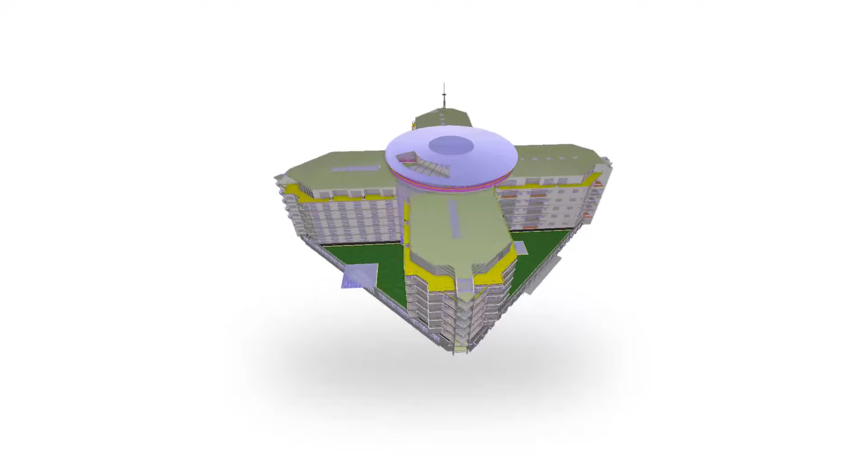Building Information Modeling, or BIM for short, is a wonderful tool to create great architecture. Unfortunately, many might believe that BIM is out of their reach. This is because adapting from 2D drafting to BIM might seem time-consuming and costly. Also, it seems that BIM means a whole new workflow and methods which you need to learn from scratch, and

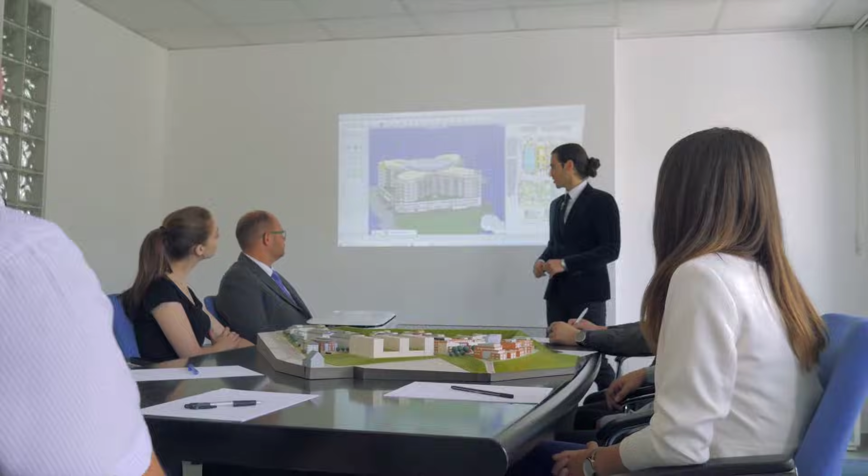the new requirements and legislations may seem too complicated to follow. Our mission behind ARCHLine is to open a gateway to BIM. ARCHLine makes the transition from 2D drafting to BIM step by step. It takes you from 2D to 3D modeling and introduces BIM parameters to your workflow. Sharing your projects with other professionals is effortless. The software makes sure that you can use your already existing CAD skills, files and projects to stay competitive.

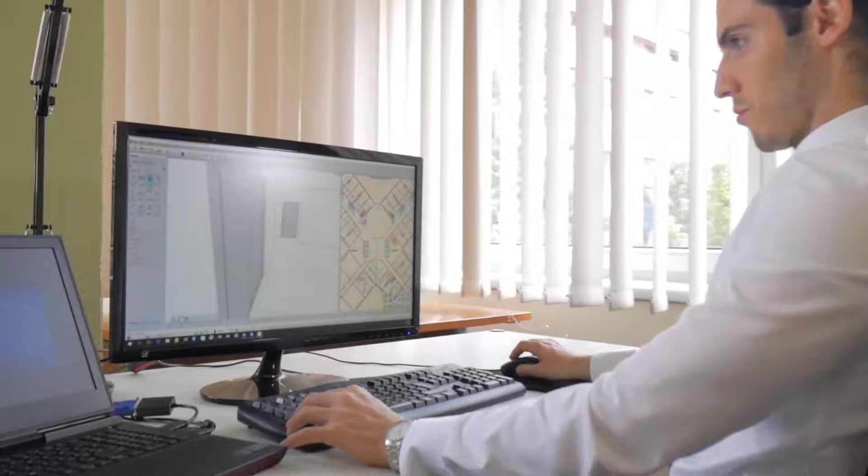The gate is now open for new challenges and previously unavailable projects. ARCHLine is an out-of-the-box IFC-certified BIM software. No extra plugins are needed to complete your project because your design will contain everything in a single file. You will work together with other parties of the building industry seamlessly. Avoid misunderstandings. Use real products. Collaborate better than before. BIM is quickly becoming the standard. Make sure you are there with ARCHLine.

Hello and welcome to the ARCHLine webinar, Designing a Building, a Fundamental Elementary Course. My name is Zoltán Tóth. Over here is our resident architect, Mr. Illés Pap. Hello there. This is the first part of our 5-part Gateway to BIM webinar series.

The main reason why we have this webinar series in the first place is because we understand that there's still a considerable fear from BIM when it comes to everyday projects and everyday architects and engineers. Now the thing is that the question is always the same when people ask us what the software does. They always want to know how certain very simple everyday tasks could be performed with the software. So instead of making this kind of static videos, we decided to make a webinar series where we take one

project, which is in this case a 2-story family dwelling, and we are going to track the whole workflow. Today we are just going to focus on how to create very simple shapes, architectural elements, and do some kind of basic documentation and visual design tasks. But in the long run, as the show is going to progress with the other installments, we are going to look at how to use external architectural data, geodetic surveys, for instance, how to work with IFC files. That's right, how to collaborate with other software platforms, how to get architectural data out of the system, some basic elements of visual design, and something more elaborate when it comes to rendering, and eventually we talk about the everyday benefits of using BIM for a project like this one, for instance.

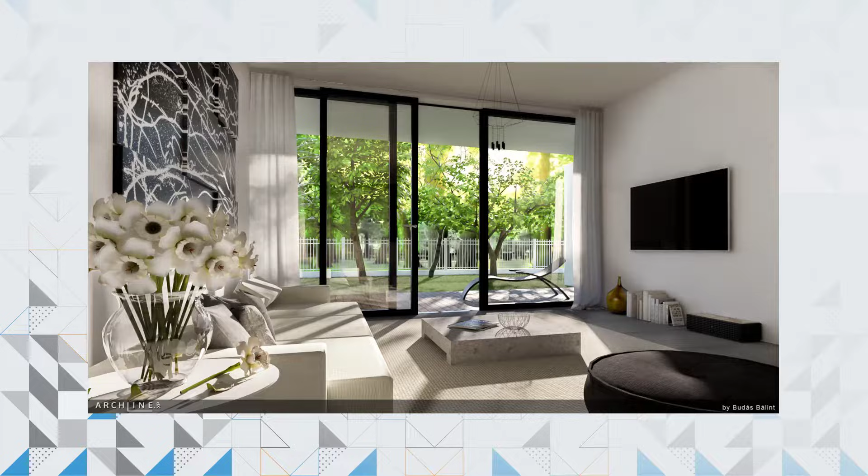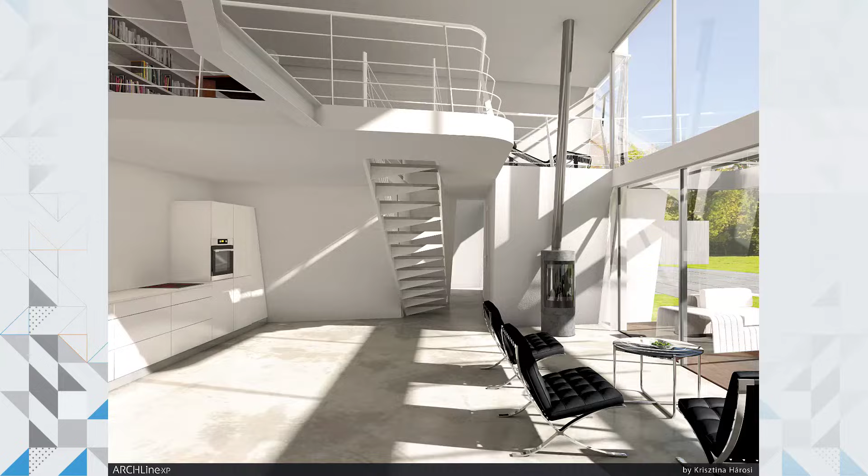Can you mention a few examples? For example, if you already have Artlantis, you can directly import your model to Artlantis. Cinema 4D is also supported. So if you already have something you used to use with a previous solution, you can export your model into that, and with a little bit of tuning, you will be able to process the ARCHLine.XP data.

And create amazing, stunning visuals even if you work with third-party solutions. So there are two ways you can get a glimpse at the final product: within our integrated render, or by pushing it into another software if you already have that. One thing we always find very important with ARCHLine is that we want to work together with other software products as opposed to doing everything in our own environment.

Yeah, so if you have other software, you'll see that when it comes to products such as AutoCAD or SketchUp, we try our best to integrate with them and work together with them.

So let's see what we have on our agenda right now. Let's first talk about how to create very simple drawings, how to put together an architectural model, and how you go about creating a building, based on what you have here in front of you. And I think we should also talk a little bit about the interface.

Oh, definitely, because I'm sure some of you watching our show might not be that familiar with the interface. Now, as we share the screen, you'll see the interface is quite similar to other similar solutions. We also have the ribbon bar at the top of the screen, the classic sidebars, the bottom bar, and the workspace.

In terms of these simple areas of the interface, we are pretty much similar to anyone else. So if you already know a solution, you'll have a little bit of an advantage, because you know where to look for the tools, where to find them. The reason we also have these is not just that we'd like to position ourselves as an easy-to-learn CAD software, which we really do believe we are.

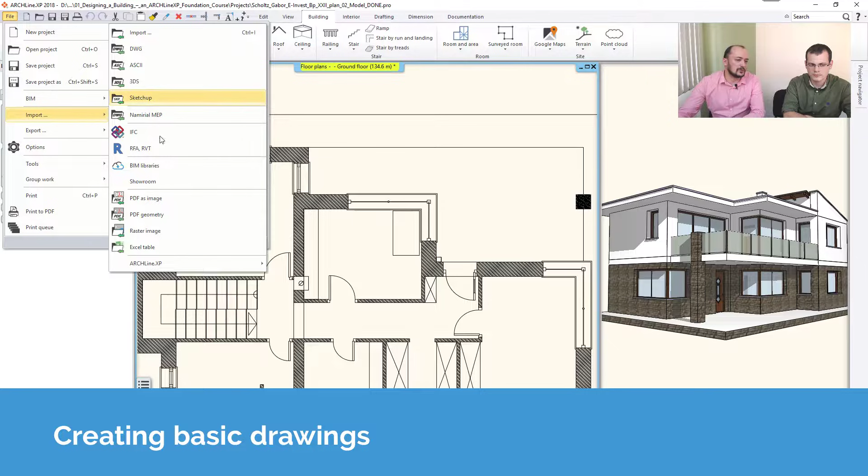If you'd like to start working with a drawing, you can either load a paper-based scan, for example. That's all found in the import tool - go to File, use import, and find the format your files are in. We will cover this, I believe, in the following section.

But if you have nothing, just a plain white paper, you will just start up ARCHLine. A dialog will come up similar to this, and you click here to open a new project, then fill up the basic BIM information about this building, like the location - you can determine where this building will be on Earth.

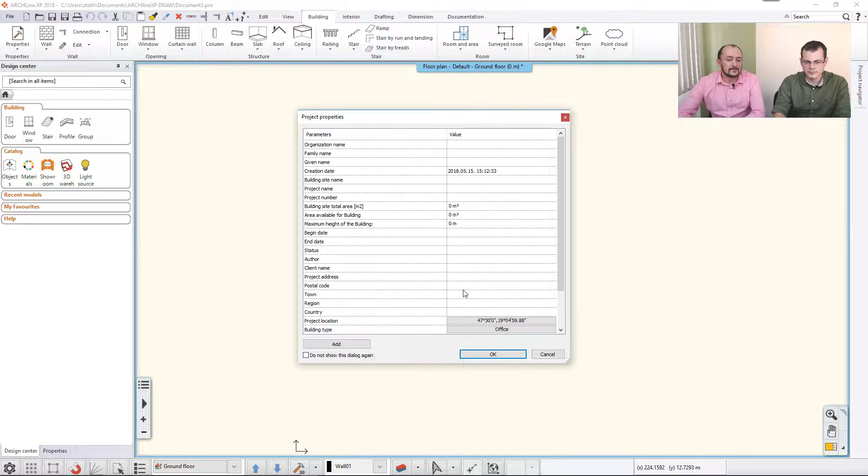You can set up the name, the designer's name, the project name, and all this information. Actually at the end, if you fill these up, you can reuse this data. You can semi-auto-fill the title box as well at the end. I will show you that in the documentation tutorial or workshop, which we will do in a later session. So now you can actually just skip it whenever you would like to set up this data. You will be able to find it in File, BIM, and Project Properties. That's the same place, and then you can start working. So either you fill it up or not, you can just start working with the tools.

Now, if you are about to draft a building, you will likely start with the walls, or sometimes you will start with drafting items like 2D. I don't know, you just would like to set up a grid or something like that. In that case, you will start with the drafting. But other than that, you will start with the wall tool.

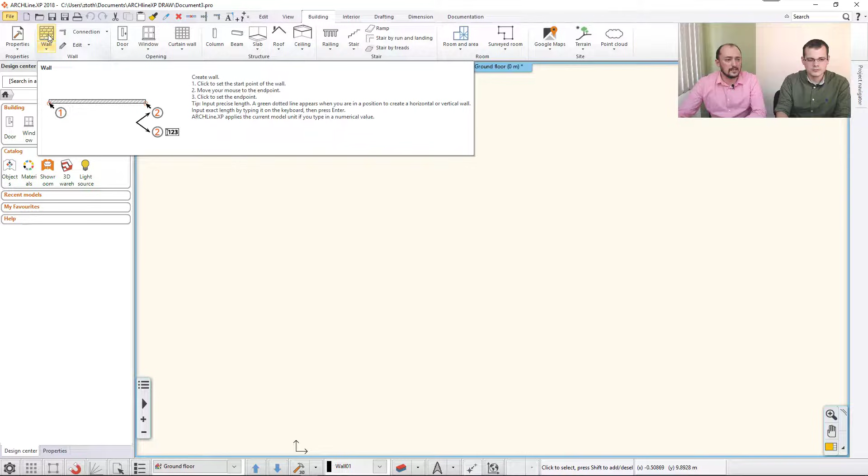Whenever you start with a tool, any of these, the software will use the current default settings. Now, if I start the wall tool, I can see that the current default setting is what we call the one-layered 38 wide wall. Now, we are working in meters, so that means this wall will be 0.38 meters, 38 centimeters wide. Its thickness is what you can see here as a number.

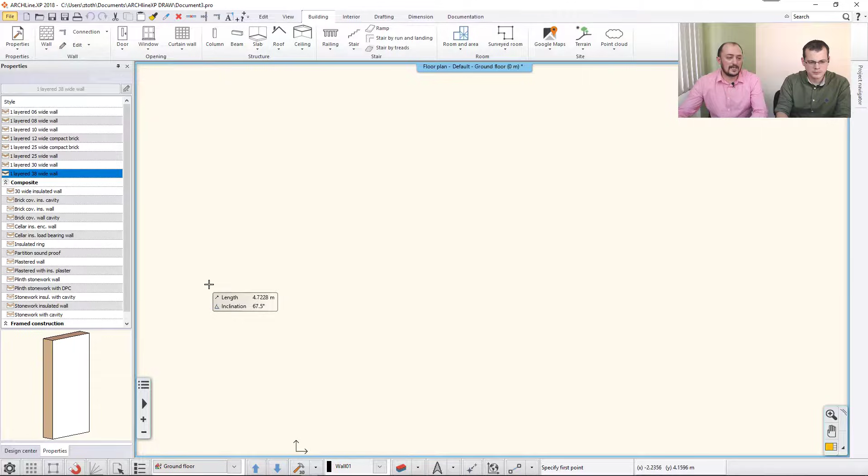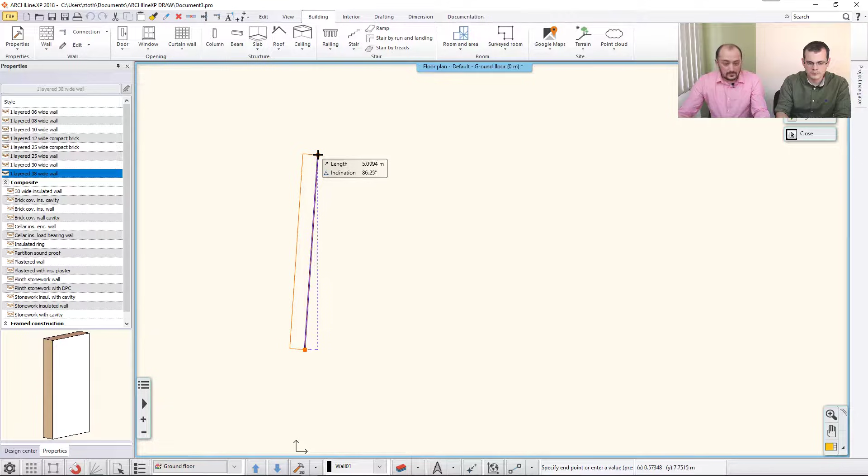And then when you would like to create something with that, you start the tool, select this, and click somewhere and move your mouse. And I'm not holding down the mouse wheel, I'm just moving the mouse. So you don't have to keep pushing and dragging the mouse cursor. You just release it and move your mouse somewhere, and then either you type the distance that you know, or you just click somewhere, and then you will have the 2D and the 3D wall automatically. So this is how you can create this here.

Also, if you would like to create something, just as I mentioned, I know that this wall will be to the right and it's about, I don't know, 1.5 meters, and I just start typing 1.5. It actually depends on how the program settings are, but by default it accepts the dot as well. So you just type the distance and then you just keep drawing the walls.

Whenever you would like to terminate a command, that now I'm about to do something else, so I would like to skip drawing walls, I just hit escape and then the software goes back to the default settings. Right click works as well sometimes. Yes, right click sometimes means enter. It depends on the command itself, but escape always means that you would like to escape that command and you don't want to do anything with that.

So this is how you can set up a simple layout of literally all sorts of drawings. But if I would like to sketch this drawing that I have here, I actually have a building drawing, a printed copy of a building that I would like to process, then I can do that as well. Or this could be something that I went on site and I would like to process the values that I measured at the survey. So either way, I can just start working with these.

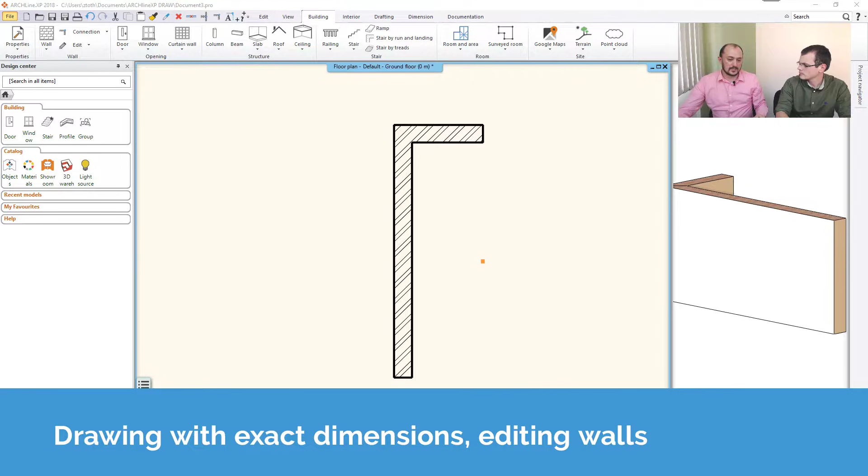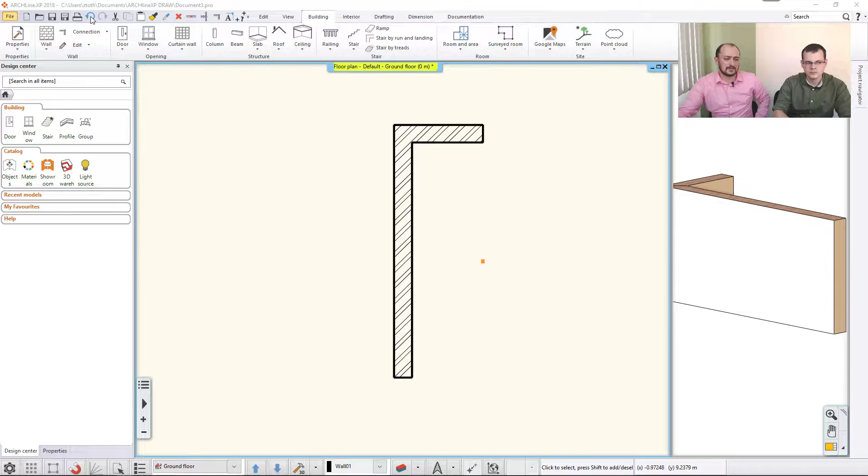Now, actually, to be able to remove these two walls, it was just an introductory sketch here. I can either undo these steps. Keep that in mind that undo is not infinite. Undo is only 32 steps, so don't rely on that too much. But at least 32 steps you can go back and you can just undo these two steps as well. But also, if you would like to, you can erase these. You can just select the walls and then you can erase these. Later we will talk about this selection a little bit more, so I just keep that for later.

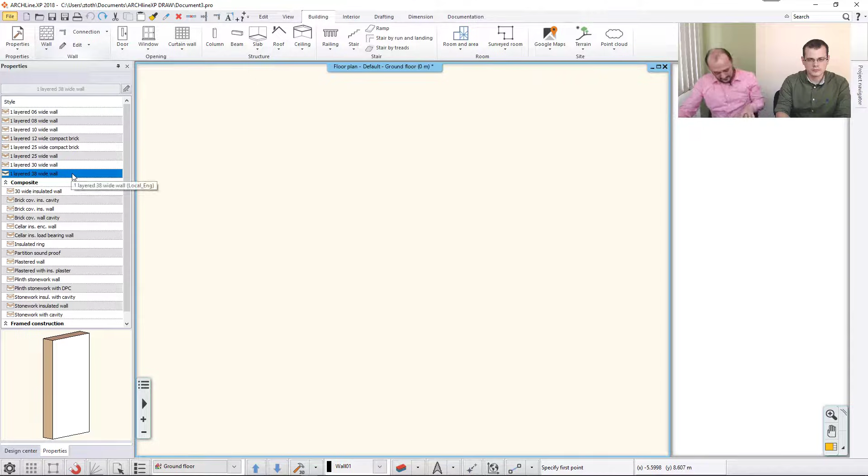And now I just undid these two walls and then I start working with the walls. So let's say I would like to draw a wall, and I know that its length was 11.9 meters. Now keep that in mind that what you draw, the wall itself is created by its blue line, that's the reference line. And now based on my drawing, I would like to actually draft the top line of this wall. So you want to have the line on the other side?

There are two ways to move it to the other side when you work with the wall tool. One way is that sub commands appear on the right hand side, so you can just click here and use the right side option. Or, other than that, you can actually use the F5 key.

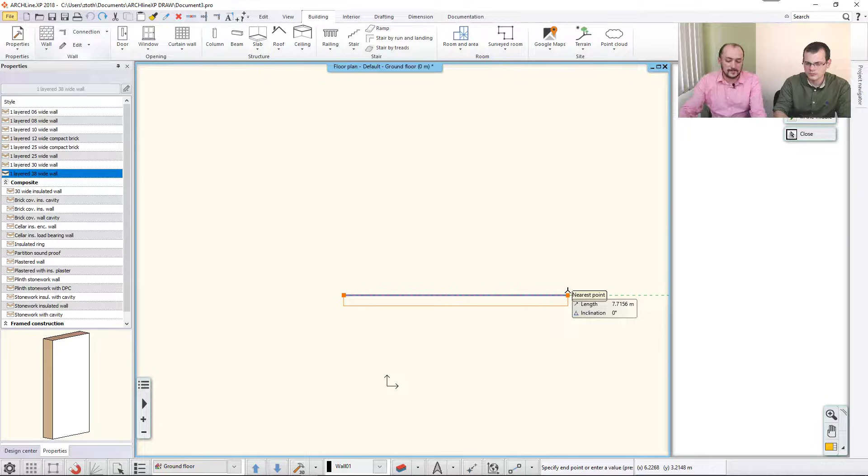F5 cycles through these reference lines, or in some cases reference points later. You just hit F5 and move your mouse and you're back to the initial status. Now I hit F5 again and hold my mouse, move a little bit - now I'm at the center. F5, move the mouse, now at the bottom. So this way you can cycle through.

This is very handy because you can do this all along. When you draw continuously, you can just cycle through this, because layouts are sometimes pretty complex, so it's necessary that you toggle between them pretty fast.

Yes, that's right. So let me just quickly sketch this, and I'll let you talk about other possibilities of how you can draft the layouts or actually drawings.

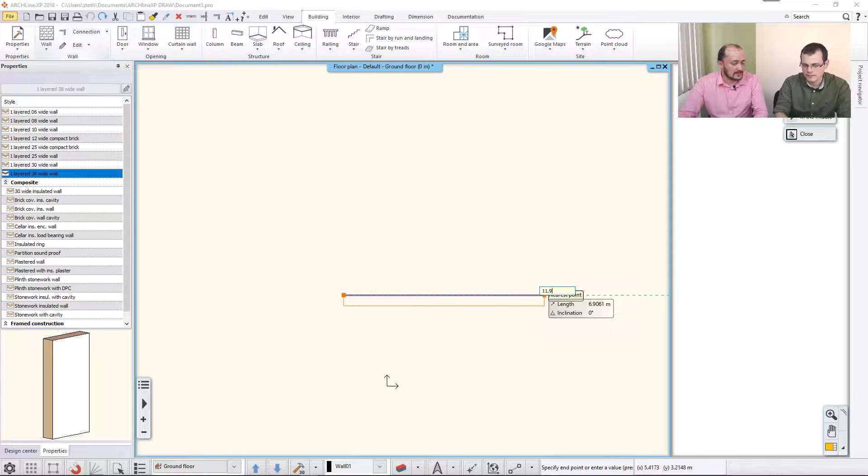One thing you skipped in the beginning, and we'll cover that later on - on the left hand side, you remember Elias mentioned that one. You can continue and I'll cover this. You can choose the wall type you want to work with. This is very important, that you can set up different styles.

We will talk about how that works, but the only thing you have to know at this point is that this is not an infinite list, of course. You can choose from the presets, but you can make your own as well.

This could be composite walls, different layers, structures, different height values. That all depends on what you actually want to work with. But these are the things that you can set up, and most importantly, you can carry this to another computer if you want to change your workstation.

The reason we stopped here is that there's a very important thing we have to illustrate, which is very familiar for CAD users. If you want to finish your drawing, you can obviously add the number if you know it, but if you don't, you can snap to nodes, what you see on the drawing.

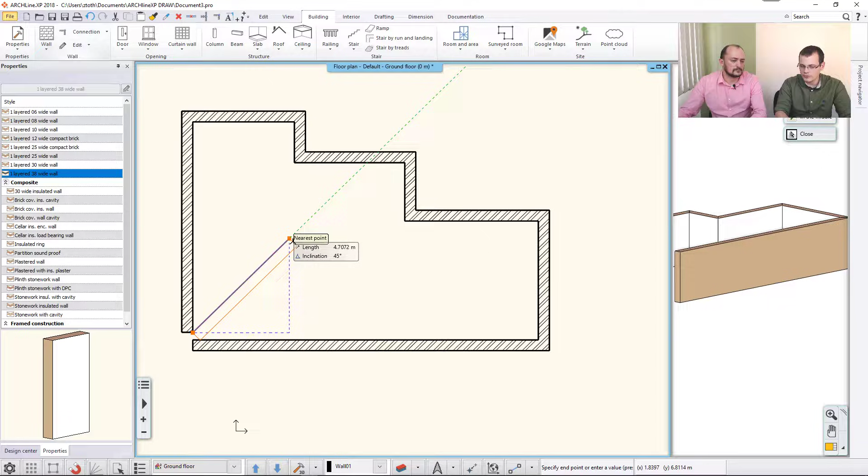So what happens now is that we are snapping to the wall just below this one, and we just click and we're done with that. We can finish the drawing like that, but we can also hit enter to close the polygon. Actually, if I just hit enter here, I wouldn't have this wall here.

The reason I did not connect these two is that sometimes you will create drawing parts that, either intentionally or unintentionally, are not connected. Whenever you'd like to click them and connect them later, you should just use these two commands - the L connection and the T connection. This works very well when you would like to connect these two items.

Now, talking about this layout - this is kind of a basic layout of ARCHLine, and I think it's very handy. You can work with this split screen view and see what happens on the 2D, and in parallel you can follow the changes in the 3D.

Also, if you'd like to swap the drawings in this split layout, you should use this tool here - this is the magnify window tool. If I click into the 3D, making it active, it's blue now, it's the active drawing, and I click here, then ARCHLine swaps the drawing. If I do it again, I click here and I swap the drawings. So this is how you swap the active drawings.

You can actually enlarge this whole drawing by clicking here and making it full screen, and then use it in full screen style, using only the project navigator to navigate through the contents. But at any time, if you'd like to go back to the split screen view, you should just use this, and then you are back to the default layout. The main reason you would use the 2D and 3D in parallel to each other is because most things you can do in either.

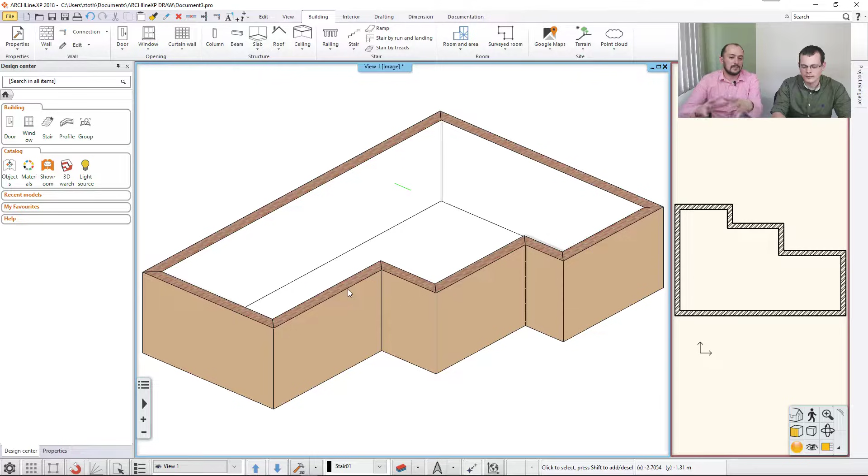So I just made a new layout, and now I will place a few other details like partition walls and so on. Just as you mentioned, we've worked with default styles, but you can create your own style. I will work with this 10 wide wall. I create this partition wall here, which is actually a load bearing wall. I create another wall, which is this one here.

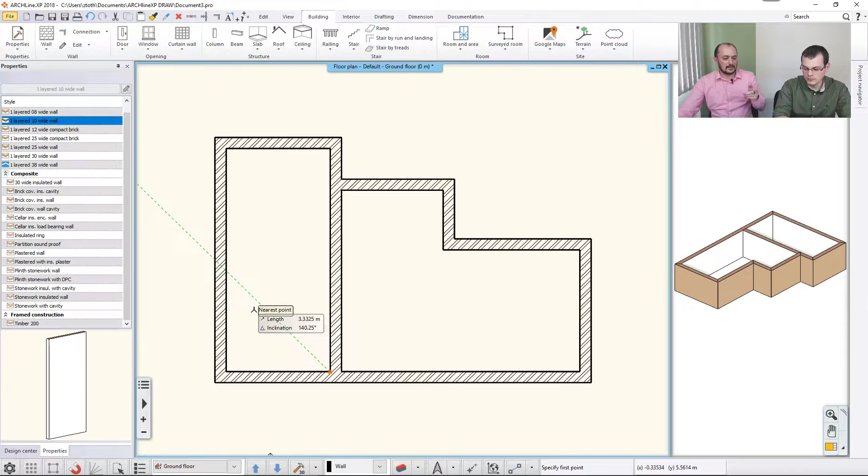Let's say I would like to create something that appears at a certain distance, but if I would like to extend this drawing, I actually forgot something. There is this tool which you can use to add inserts or add-ons to this layout. On my drawing there is a detail with a width of 1.8 and depth of 1 meter. I can change this, and when I say OK, I can place it over the wall.

Now it's important that when you hold your mouse at a point where it makes no sense to place this shape, because it's not in a wall, you will see this exclamation mark. Don't worry, that just means you cannot do that there. But if you move your mouse over the wall, then you can move it into place.

Again, here you can use the F5 key to cycle through the top point, the center point, and the bottom point, as you can see here. So now I know that this distance is 2.3. I type it, and now I have that. Now it's actually a great guideline.

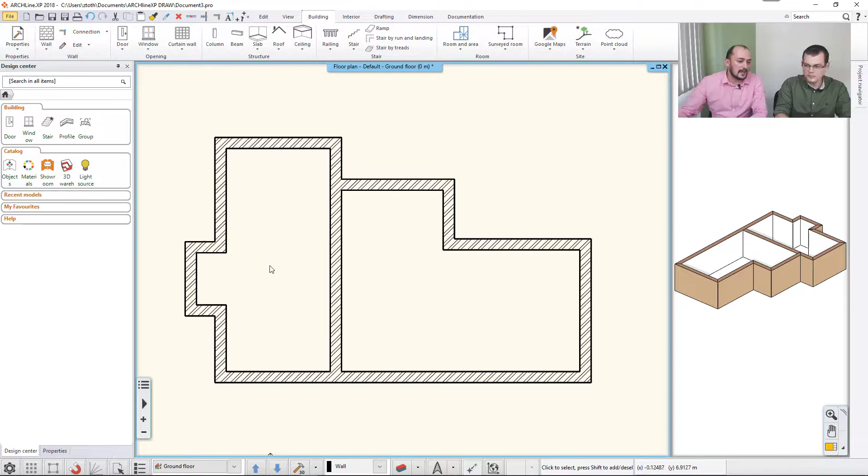I will have a staircase here, so now I can use this guideline to create a partition wall, and I create it here. I will also create a partition wall here. Now again, I need to cycle through these points, pushing it to the other side, not to the center in the middle, but to this one.

Again, I just keep my mouse here a little bit, then click here, move the mouse here, and either type the distance, or I just literally graphically draw the walls themselves. Now if I would like to create a few partition walls here, I can either do it like this, sketching the layout itself, or I can show you something else.

I forgot to mention that you can also lock the direction. So now I move my mouse to the right hand side, and if I hold the shift key and then move the mouse a little bit, the direction is locked. It's similar to what you mentioned at the beginning, but this way you don't have to move your mouse there first and then use it. You can simply hold this down and then refer to a point that exists somewhere else, horizontally and vertically as well.

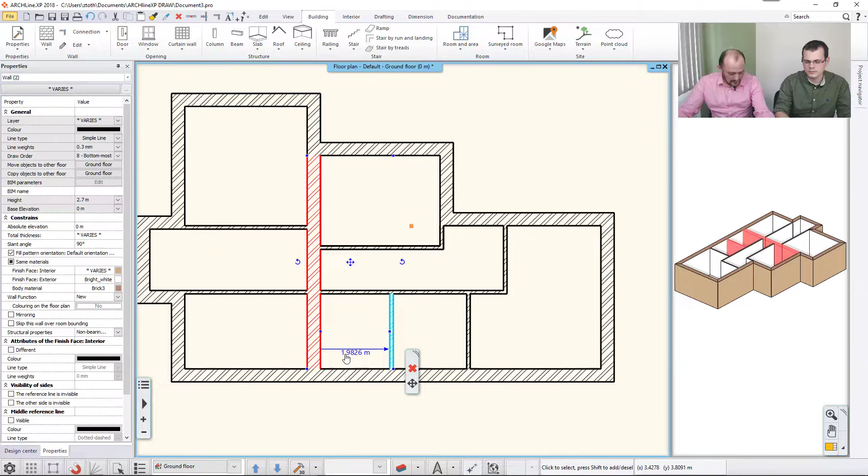Yes, that's right. So why I created this so quickly is that I know the distance between these two walls. There is a wall distance from here to here, which is 2.35 on my drawing. So I click here and type 2.35. What happens here is that you select one wall first, hit Shift and select the other wall, and then you are able to access this vector where you can add in the distance between the two.

Actually, we can also talk about the selection a little bit, how selection works, because now we have a few things to work with. So how do we manage them? Well, selection is pretty basic. You just literally click on the item and it gets selected. If you click on another item, that other item gets selected.

But if you would like to select two items, you can hold the Shift key and click on the second item to add it to the selection, and then all others will be added automatically. Now, it's important that if you select something first, it will be highlighted with a different color. That means that was the first selected item. Why is that important? Because based on that information, you can change the distance between the first item and the rest of the selection.

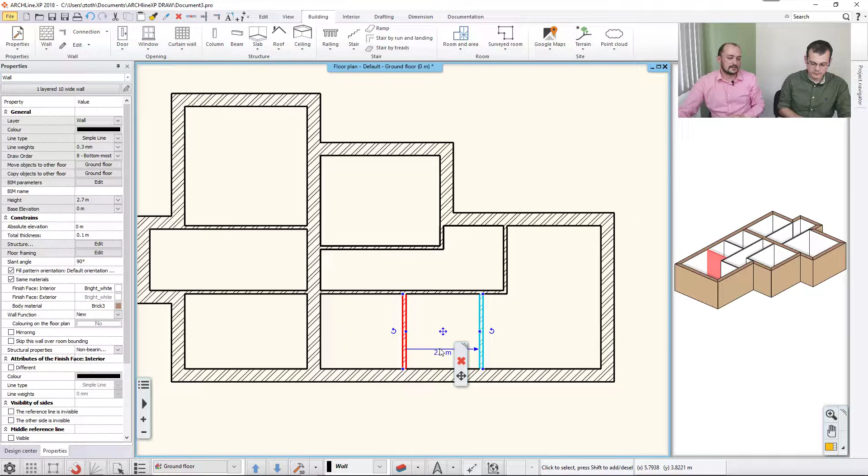So the first always stays where it is, right? Yes. Or you can just change the direction, so you can make the other one the first selected or highlighted one — you can do it the other way around. So if I would like to change this as well, it's 2.1. I just click first on this, Control click on the second one, and type 2.1 and enter, and that's it. Now, pretty much the same way, you can actually select partition walls and make them change for any sort of reason.

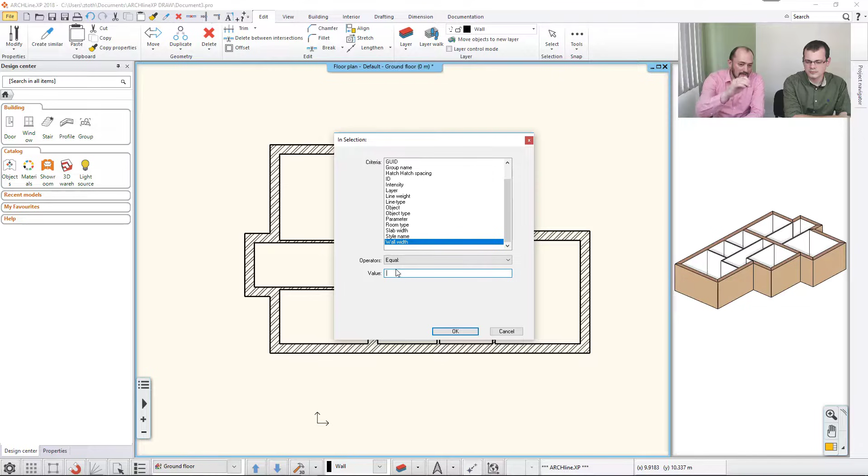Or if I would like to change the color or material of the exterior walls, I would like to use something like a stone pattern. I can click and Control click and keep adding these things, but actually there's a more sophisticated way if you know that all these items share a common property — their thickness, for instance. In that case, you can use the edit tool and this selection bar here with all sorts of selection items, including one called by properties. If you click there, you'll find a property which is the wall width, and then you can tell the software to please select everything that shares that wall width. It should be 0.38, and then everything is selected.

Supposedly we don't want to have this one in the middle selected, so how do we get rid of it? In that case, you can just use the knowledge you already have — how you added an item with Control. So if you hold Control and click on a selected item, it will get removed. So it's not selected now. Now only the exterior walls are selected.

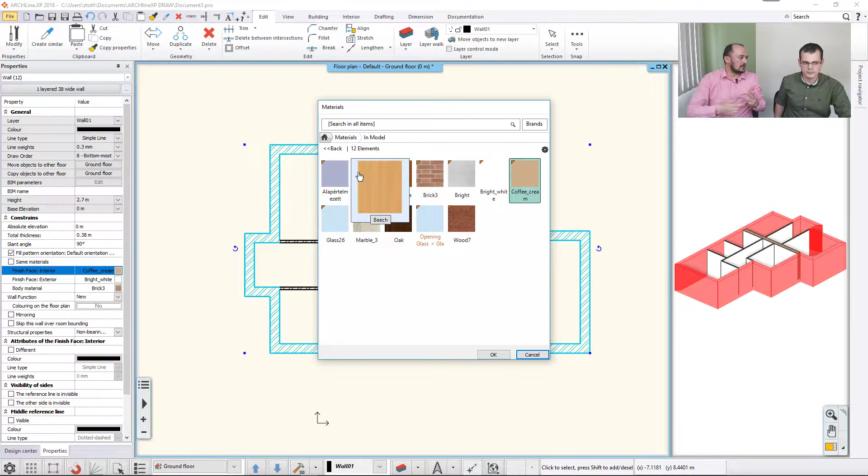So now I can go here and say that I would like to change this material to something else. This is the material library. I didn't mention it, but besides styles, ARCHLine comes with built-in material libraries, doors, and everything else. Now I'm working with the materials. I go back to the libraries, and you can see there are several sub-libraries where you can find these items. I know there's a stone somewhere, but I don't know where, so I just use the search field and hit enter, and it finds everything with the name stone. I'll just use this one, for example — stone decoration should be good.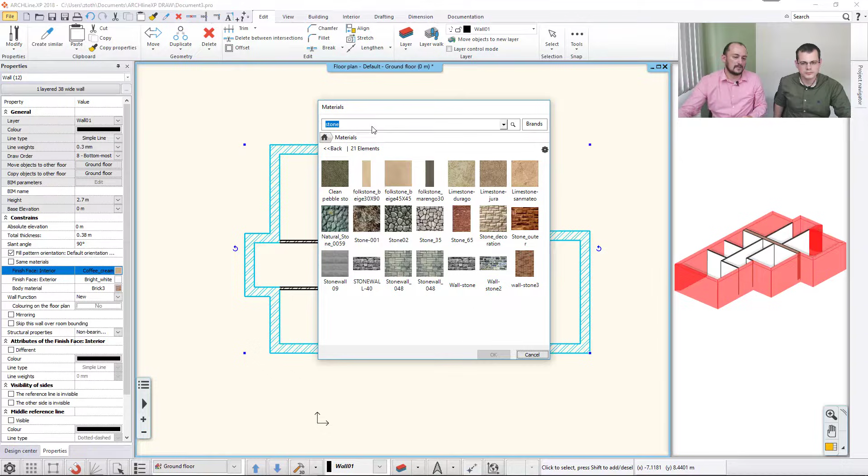Yeah, so that's it over there, and now I will just quickly create a slab under this whole building, using the slab tool. Now I can either manually click point by point, or I can use slab by walls and click here, covering the whole building, and hit enter to quickly place a slab under the whole building.

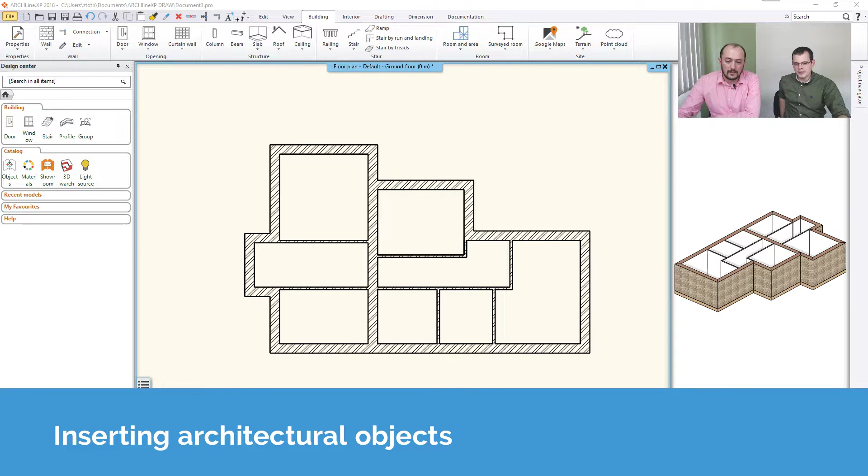And now we can actually talk about the architectural items. Yes, let's stay at this slab for a moment. So it was created with one click, recognizing all the wall shapes, and it copied the shape of the rooms from the load-bearing walls. But how do you define the outer shape? Let's say we want to have a balcony over there, or like a terrace.

Yeah, well, actually, you can. I could have already created it by just clicking on the points. But since I already have this, I can select it and see this outline appears with corner points and sides or edges. If I click on the edge, it comes with this list of options. So I just use offset, and snap it to this corner point, and now I already have a small terrace.

Or if I would like to do this in 2D, I go back to the 2D, enlarge the 2D, and I click here, offset, and move it here. So this way you can change the shape of an existing slab, wall, or nearly most of the things that you create.

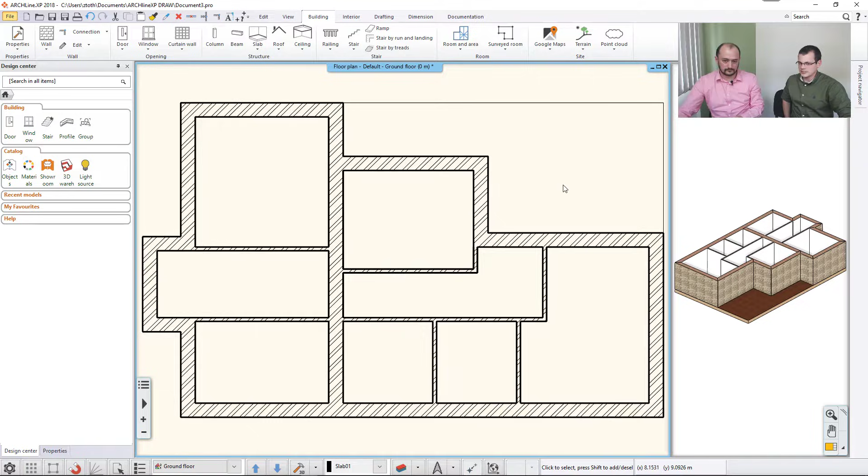What about ceilings? What about these kind of elements? Well, ceiling is actually, there are two ways. There is a tool called ceiling. If I would have only one floor, I wouldn't create another floor, I just would create a ceiling and then I'm fine.

But if it's a multi-story building, usually, and if it's not having like a suspended ceiling like this, then I just use the slab tool to create the following floor, and so on. And then actually I will copy this building part, make another floor.

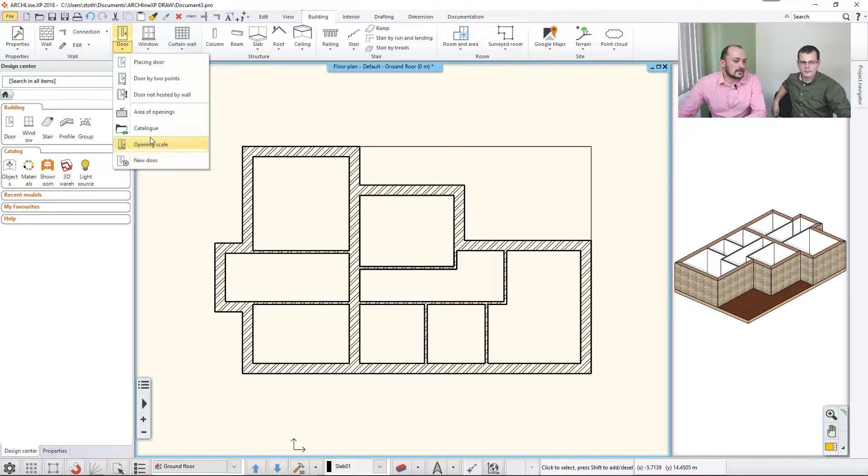But before I do that, let me just quickly place a few doors and windows on this layout. Well, the doors are here, and again, it comes with a list of options, but usually we use the placing door option, which is very simple. You just select the door type, click on the wall, and move your mouse around and find the best opening direction, and if it fits, then you just click again, and then it's there.

Now keep in mind that there are several different styles for doors in partition wall and doors in load-bearing wall. What's the difference between them? Let's see, there is this door in a load-bearing wall. If I move it here, see it's coming out of the wall - see that orange shape? It's not inside the wall. Yes, and the reason is that it fits best in the load-bearing wall because it has an offset, like around 10 centimeters.

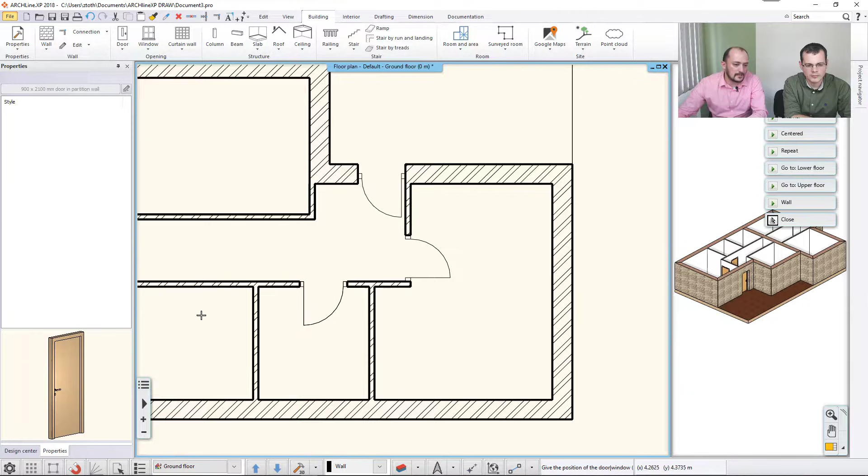So if I don't want to have that offset, I use it with a partition wall setting, and then it snaps to the side of the wall automatically. So I just do that, I click here, again, click here, click here, click here. So I just literally quickly set up a few doors. Naturally, you could position them by measurements - as you can see the blue nodes appearing, you can position them any way you want.

And also if you did not do that, but you would like to change that later, you can just simply select them and type the distance, and it will change the distance. Or the same way, you can change the size of the doors as well. So now we have these doors.

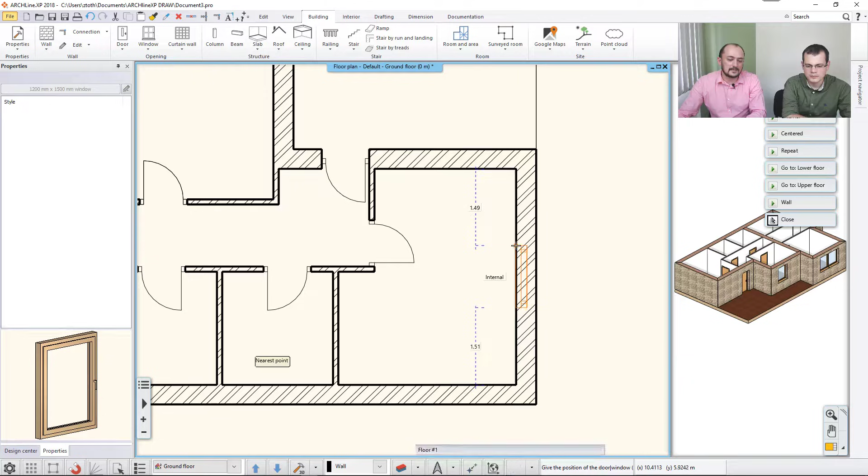Let's just create a few windows, and there I will also create an opening. Let's say there is a window here. And again, here you can use the F5 key, F5 center, F5 right hand side, and others, and so on. Yeah, so I just quickly add these, and I keep in mind that if I would like to change the size of them later, then I can do that, of course.

You mentioned an opening, so that means there are not going to be any door leaves. So how do you do that? Actually there are several ways, but the simplest way is that you just simply use a door - let's make a door appear here, and actually the normal opening is the easiest way. You just click here, set it up, and then it's over there. You can then click on the side, and click on the node, and you can change the size, snap it to the other point, and so on. So this is how you do it.

Now actually we have space for a staircase, so I will create a staircase. The staircase tool comes with predefined shapes. You can actually design your own stair shape as well, but mostly we work with these predefined shapes because that's the easiest way to create a staircase like that.

So I know I would like to create a U-form staircase, so I just click here, here, here, and snap it here. And see, now it's wider than the available space, but that's because the basic settings will automatically create a staircase with the width of 1 meter. So if I just select it and go to the details, I can see these parameters revealed. If I would like to change the width of this staircase, I just type 0.9, and this is the proper width.

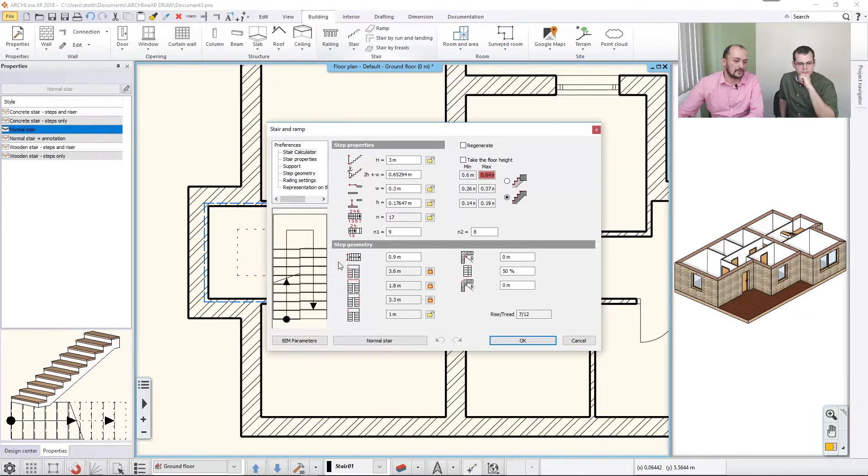And another thing, this staircase needs a railing. If you'd like to add it, there are again several ways. There's the railing tool, but you can also go to the settings of the staircase itself, and you can find these railing settings here, and then just turn on an existing style.

Now, you can build up your own railing styles too, but we do not cover that now. I just use a predefined stair railing, using this steel profile, and I hit OK, and the software automatically generates it.

But if you would like to, you have all the freedom to generate and create all sorts of staircase and railing styles using the railing tool. I will use this a little bit later.

So now I have this here. Let me just open up and see what we have. It's nice, we already have this first floor, it's coming together pretty nicely. But let's put another story on it, because this is actually a 2-story family house.

So how do we go about placing another story? Do we need to copy the wall layout, or how does that work? Well, actually, I could draw the following floor, but as you mentioned, the simplest way is if I have something that repeats itself, at least partially.

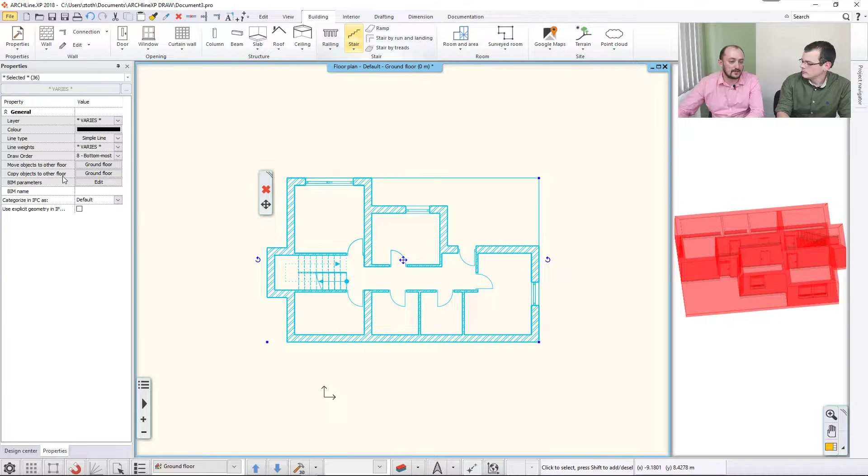Then it's easier to simply select it, and on the left hand side you can see an option to copy objects to other floor. Now these are not necessarily only objects like stairs and chairs, but you can copy everything that is selected. You click here and then you select the first floor.

The software comes with a predefined setting of 4 floors: basement, ground floor, first floor, and second floor. You can name them however you want, but this is the basic setting. And actually the floor management, or the story management, is here.

This is the status bar that I mentioned at the beginning. If you click here on this button, you can see the ground floor, the first floor, and so on. There are constraints as well that you can change, and the software can react to these changes.

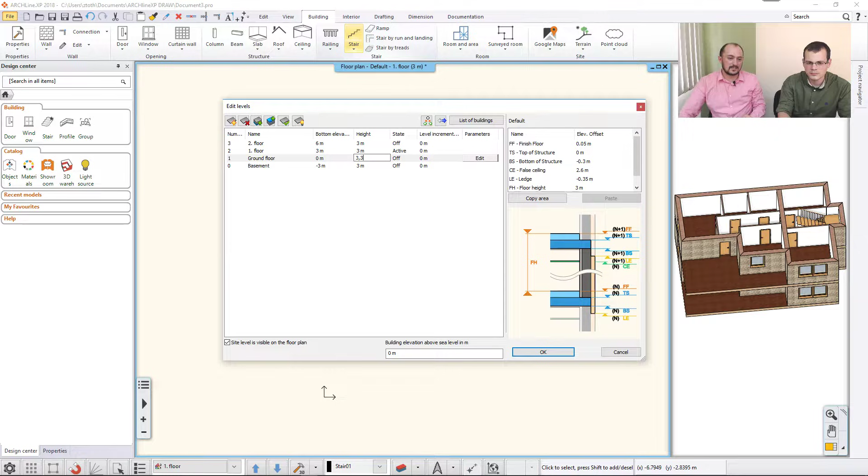Not to mention more sophisticated things, but if, for example, we had this coordination meeting and figured out that the height of this floor should change to something else, like 3.3, then I just type this distance here, make changes, and hit OK, and the software will adjust the walls automatically, because they are automatically constrained at the bottom and the top. You can work in another fashion, but this makes it simplest to generate this content.

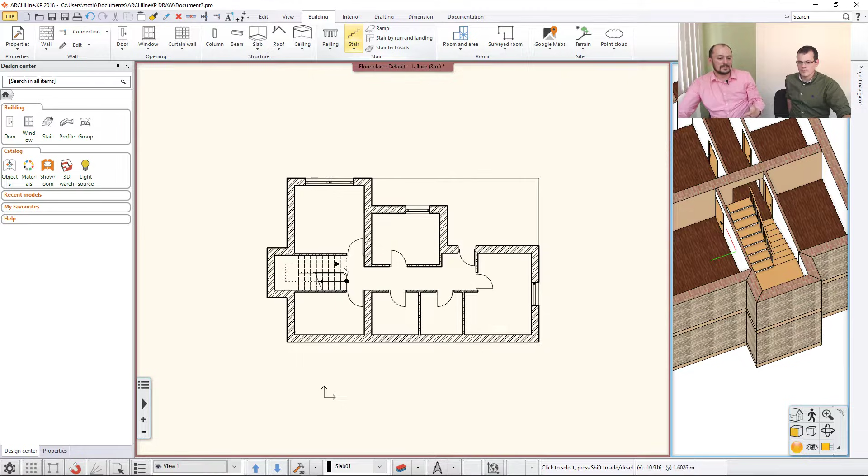And now that we have this extra level, we can customize it. There's one thing I need to change here quickly, and that's the staircase. I don't want to have an additional staircase. So first things first, I go to the settings of this first floor stair symbol, go to the support page, and disable the 3D creation.

I don't want to see the 3D body, I just would like to see the shape of it. Why don't you just delete the whole thing?

If I would delete it, then the 2D symbol would also disappear, and I would like to see that 2D symbol. So I just disable the 3D option, and then I go to this first page, the second page, and there is this 2D representation, which I changed to no section line. It's just one staircase as it is.

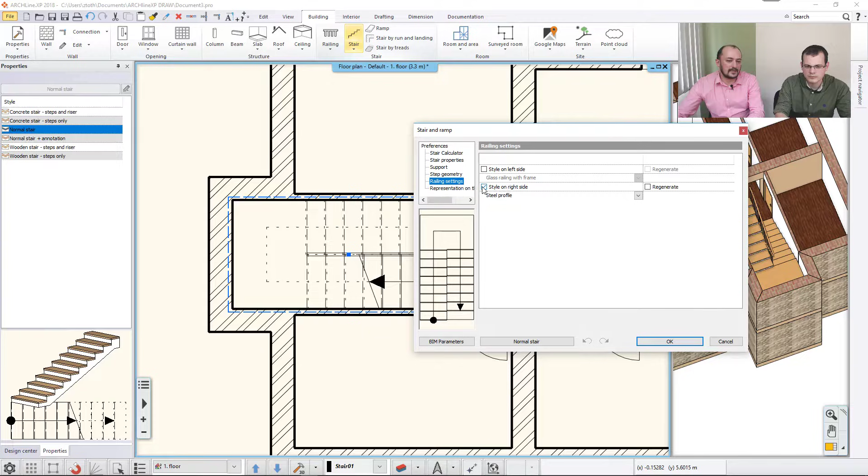And then I go to the railing settings, and I don't want to see the railing itself floating in the air, so I just hit OK, and there is only one staircase with one railing, and there is the second symbol here. And if I swap between the floors, like here, this is the ground floor and this is the first floor, 2D is correct, 3D is correct.

Now in the 3D there is only one problem, that we cannot use this there because there's no hole in the slab. There's no hole.

Yeah, you can actually, you have several ways to solve this. One solution is that if you click on this side of this wall, using this quick selection menu, you can swap to the slab, and you can find in the slab local menu, this is the context menu that you can find here, you can find these tools, and this allows you to literally draw a hole somewhere.

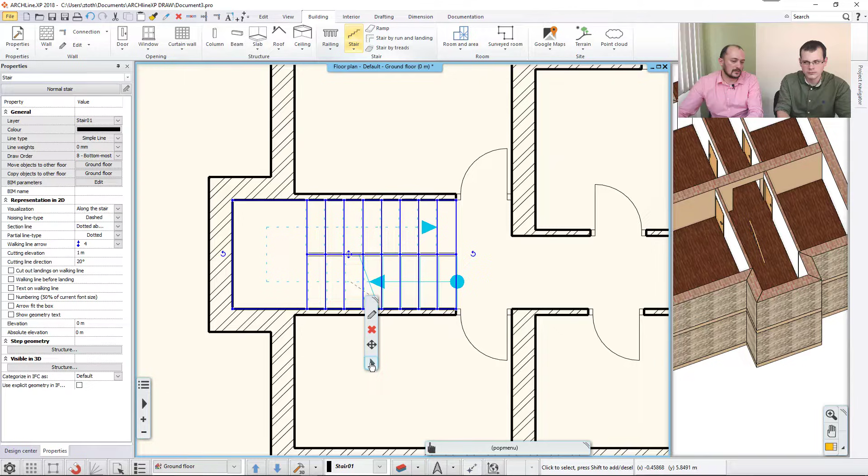But there is an even easier way to do that. If you click on this staircase and you use its own local menu, in its own context menu, then you can use this, cut slabs above the stair. If you do that, the software will auto-solve this. I assume you can fine tune if you want. Yes, but this is the minimal cut that it's necessary to be able to use this stair.

But if you would like to have a larger opening, you can just go above, find this slab here. I click here, and I cycle to the slab, and I can see the slab contour, even the hole contour, and then I can click here, offset, move it to someplace else, like with the slab itself when we created the terrace, and hit enter. Yes, and now I have this here.

So one another thing here, let me just add a pole, you know, like a column. And that's again with the column tool. The column again comes with several predefined styles that you can also build up on your own. And then you can just use the F5 to cycle through these points, as you can see.

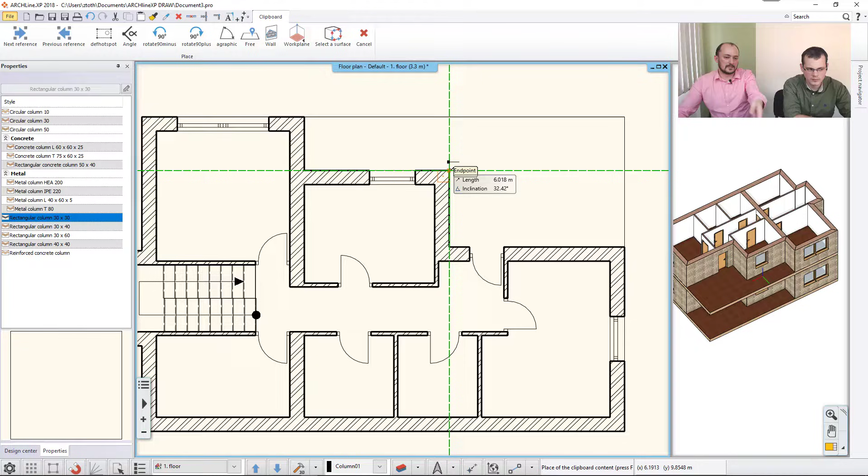And I would like to place this with its right top corner, referring to this point. I just keep my mouse here a little bit until these green lines appear, and then I can just place it here, and then I have the column, and I can repeat the same thing at the bottom floor.

Or now I can actually just click here and copy this content to the ground floor as well. Yes, you can copy. Yeah, that's right. Or you can just have it on one floor and have it extended above. But that's another setting. Yeah.

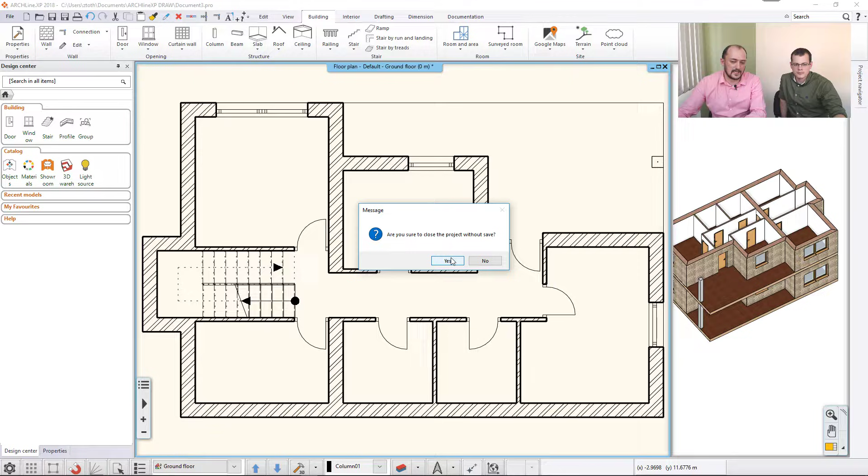Okay, what happens with roofs? Yeah, let me open the following project, which actually has the same exact project, little changes around materials and a little bit of extension. Using the same tools, we just created this following layout, changing a little bit of the settings of the walls and changing the layout itself. So now we can talk about the roofs.

If you would like to create a roof, you will have at least two options to create a roof, the flat roof or the regular roof. Now if you would like to create a flat roof, we actually have a roof floor for that. And then here I can create the flat roof. This is this part appearing here at the top. This will have a regular roof, but this here should be covered with a flat roof.

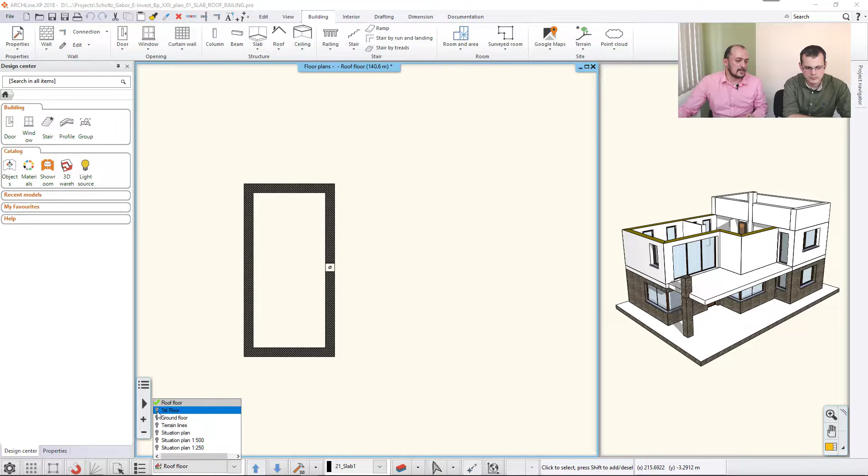If I would like to see the floor below this one, to be able to refer to existing points of the drawing, then I can just go here, open up this quick menu, the jump menu, and then I can just click on this icon to turn on the visibility of this floor and click here, and then I can see this contour.

So now if I use the slab tool in sketch mode, I can just click on the corners of this drawing. If I make a mistake here, I can just undo that. And I click here, and then if I hit enter, the software closes the loop, and I have this here. I can select it and make an offset to all of the edges to make something like this. Then I can click here, offset this until this point, offset this until this other wall here, and so on. So I can just customize it.

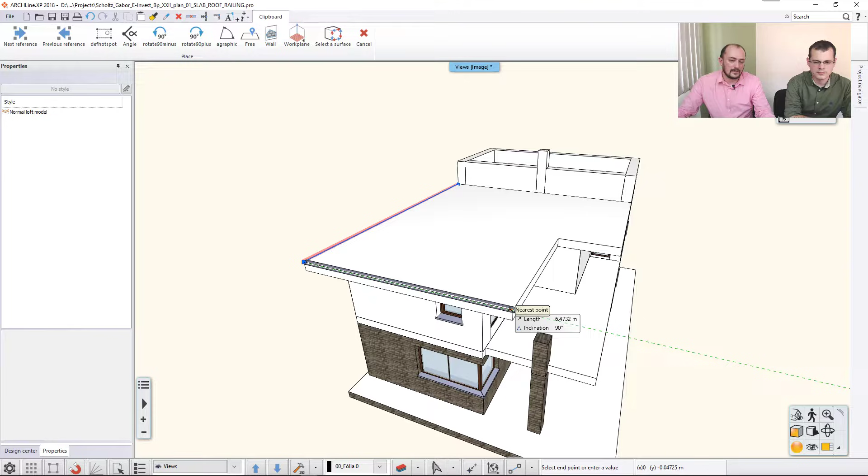And then if I would like to, I can also add some decoration profile all around using the interior sweep, and there's the sweep tool. With this one, I can select the surface, and click on the edges of this surface to design something like this - a decoration profile following the contour of this slab. This is actually a very useful tool for other purposes as well. Basically you define a path through which a profile would be dragged. If you have used SketchUp before, this is similar to what the Follow Me tool is doing there. So you have to define one profile.

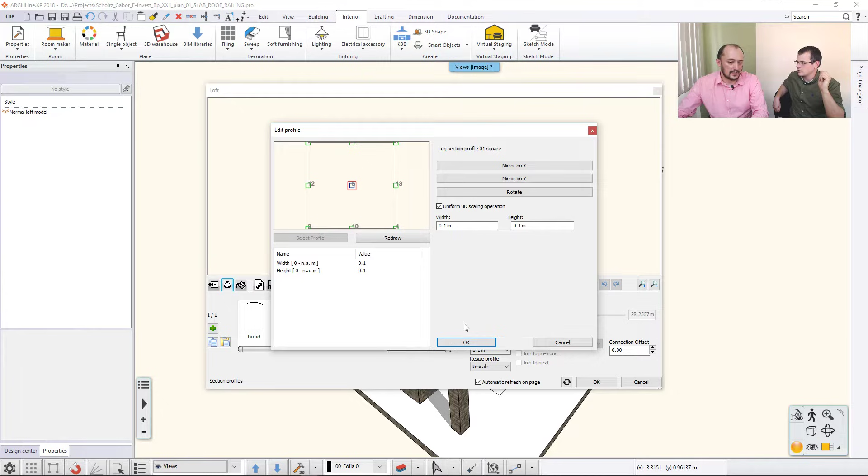What we are going to do now is make it a decoration profile. You set up the main dimensions, width and height. This is not going to change the path itself, so the path is definite, and then you just add another profile to it. I can also change the material, for example, to fit this decoration, to have something like a rusty gray. So I just keep going and make changes.

Now I mentioned that I would like to show you something before I go to the following - I think that would have been the flat roof. The roof itself on the other side of that. But before I do that, let me just finish this part here as we work on this area.

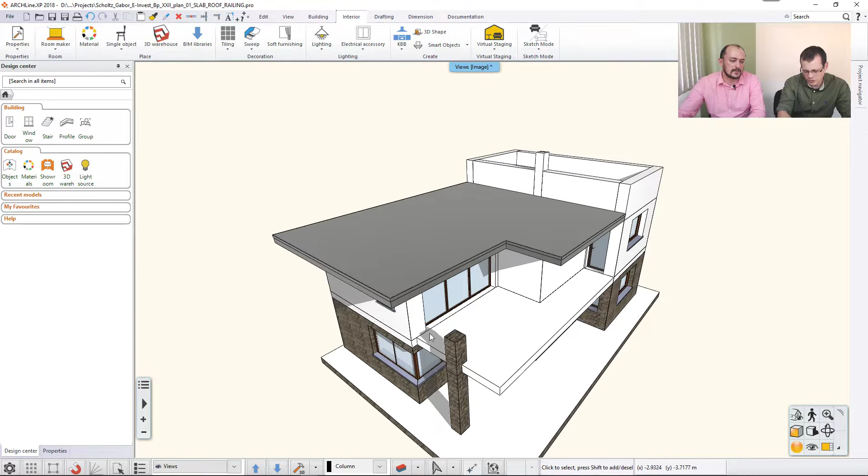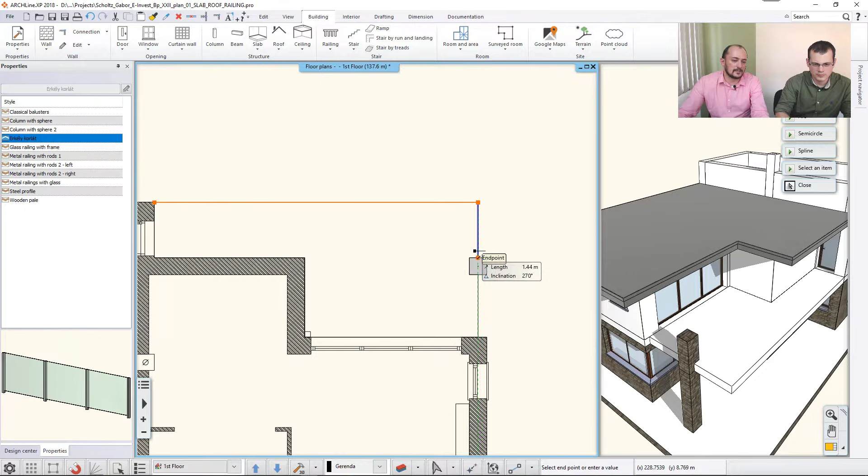I just would like to create a railing here. So I go back one floor down, and then I use the building railing, and again there is a built-in setting for this, and you can change it. You can see the preview of that railing that you will actually create, and then you just click enter, and the software will automatically create this here.

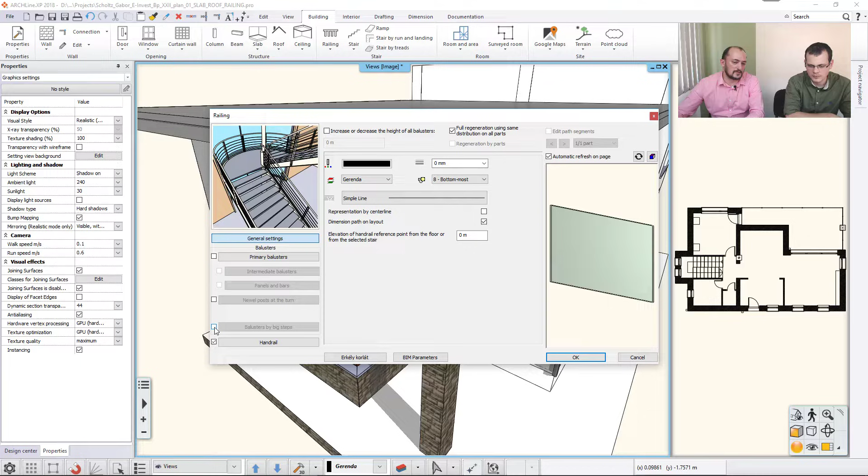And then again, you can change its design. You can go and find detailed settings, in the 2D or in the 3D. You can zoom in, select it, and go to the details to find out something you would like to change - maybe the balustrades are too dense. Or, for example, I don't want to add these poles at the beginning and the end because it is supported by the wall. Or I can also remove this center line here. So these are just basic changes - you can do way more than this. It's just a simple example of how you can customize the content that appears by default using ready-made styles.

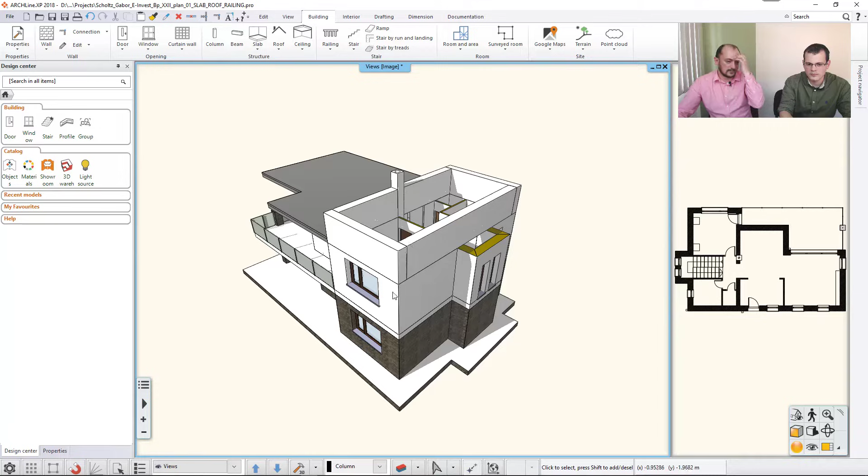And now let's just go back to find and create a roof here. I just rotate it around so we can see its complex shape. And then I go back here. And now I will go to the roof floor, and here I will design a roof.

Now roof comes with pretty much a lot of settings and options, but as you can see, these are all handy. You can just quickly create a gambrel, you can create an open gable, you can create all sorts of roofs by just setting up one command and saying that I would like to have a roof from here to here, and it automatically creates that. You can change its height, you can change its settings, and you can go with predefined styles.

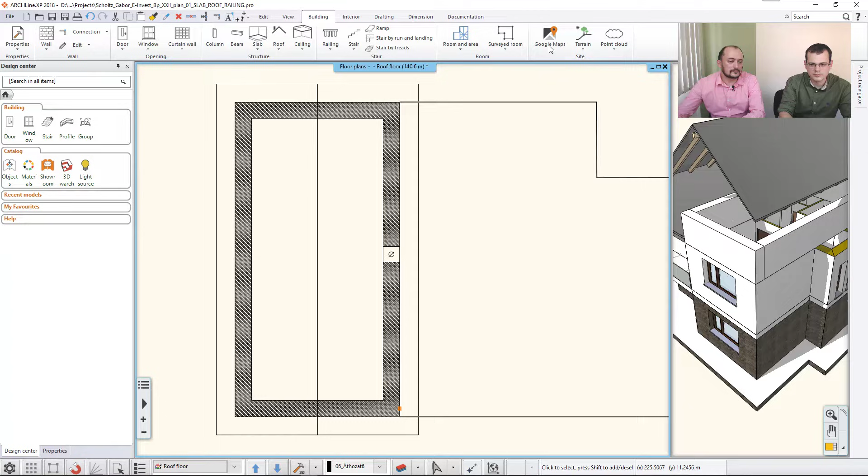If you do not want to use this, but instead would like to create a roof with only one plane, you can do that as well. You can again draw it around - so you first define the shape, and then you define the height values, right? Yes, that's right. And then you can set up the first point and the second point, and see the arrow indicates the slope of this roof. This is going to slope upwards, right? Yeah, that's right.

And then you can set up the slope, the pitch, the angle of this roof as well. You can set up its base elevation. Now I think this should be something lower, like 0.5 or something like that.

And then the software automatically creates that. So now it's in relation to the floor on which you are, right? So it's not to the project zero base level, but to the floor. Yes, that's right. Because it is measured from this point, and that's only half a meter.

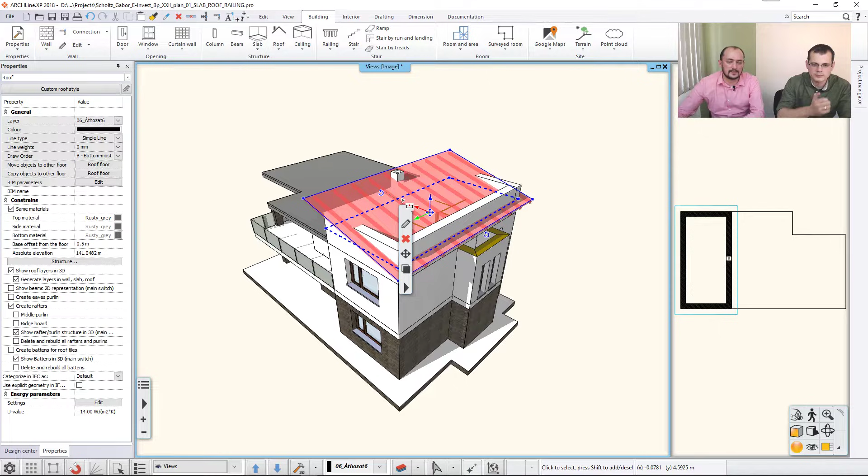If you would like to change that, you can further change it. You can select it either in the 2D or in the 3D, and you can say that this should be something way lower, 0.1, or you can just graphically move it by moving this arrow here.

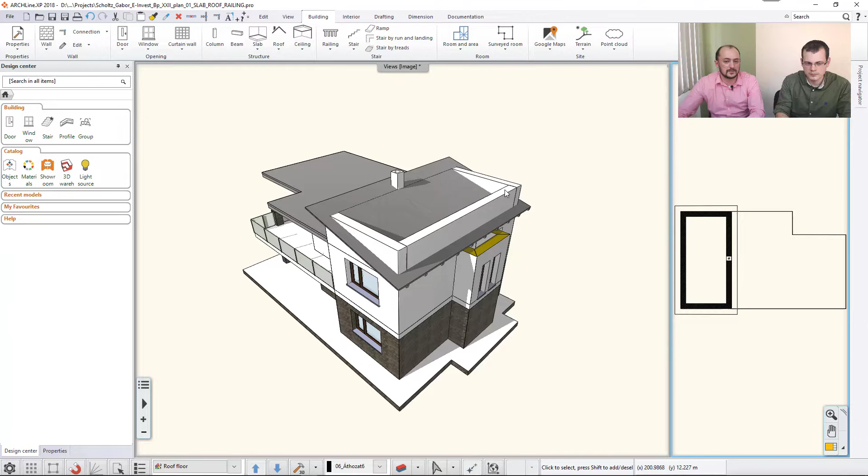But if it's done, you can actually get rid of these walls automatically. The default settings of the roof will automatically cut the walls if you go back to the 2D and rebuild the 3D based on the current drawing settings.

As you can see, every time you do something in ARCHLine, the software is going to do the changes both in 2D and 3D, in terms of the viewports.

There are some scenarios when it's not doing this automatically, and that's usually because of conserving resources, since these changes are sometimes not necessary to track in real time. In this kind of scenario, you can manually rebuild the 3D.

Just click on the 3D hammer, and your 3D is going to be refreshed. In ARCHLine, the 3D rebuild and updates of the drawings are transactional. That means you get to decide when you would like to update them, and you don't have to accidentally wait minutes just because you made a change that must be followed everywhere.

You just click on the 3D update button, and then it will automatically sort out every sort of detail, and it will automatically regenerate the elevations and sections, which we will pretty much soon cover.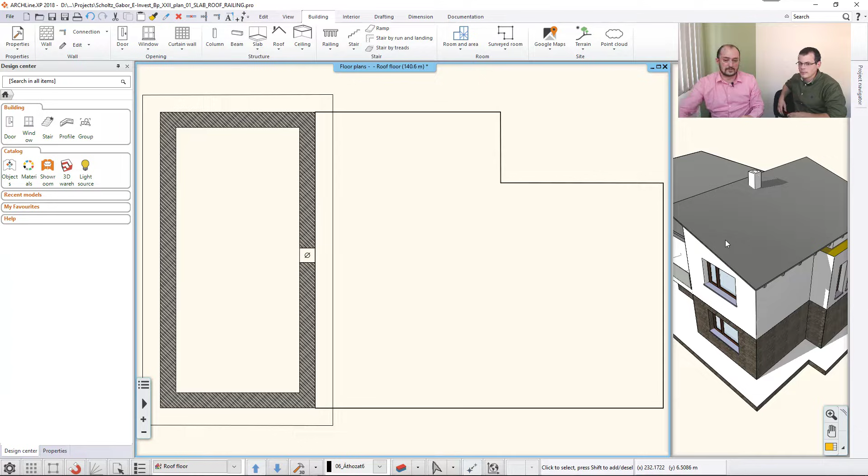I see that there's an extension to that roof. So how do we add that? Well, actually for that I again need to open up and enable the visibility of the first floor to see this detail, and then I can click here and add a node, and click again to add another node here.

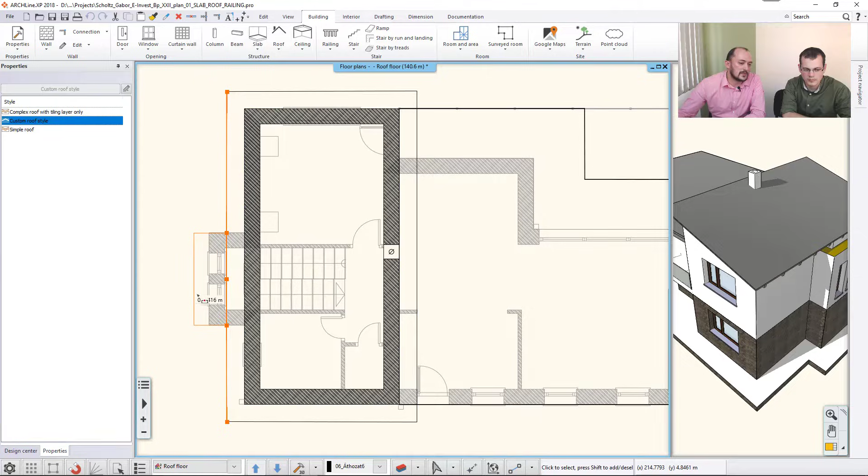Then I just move it someplace here, and so I just reshape it. I can again use values that I know, the distance and so on, and I can reshape it in a way that I would like to do that.

Now we have pretty much all the structural elements that we wanted to add at this point, but now's the time when we talk about how to manage the project itself. So what kind of tips can you give us at this point?

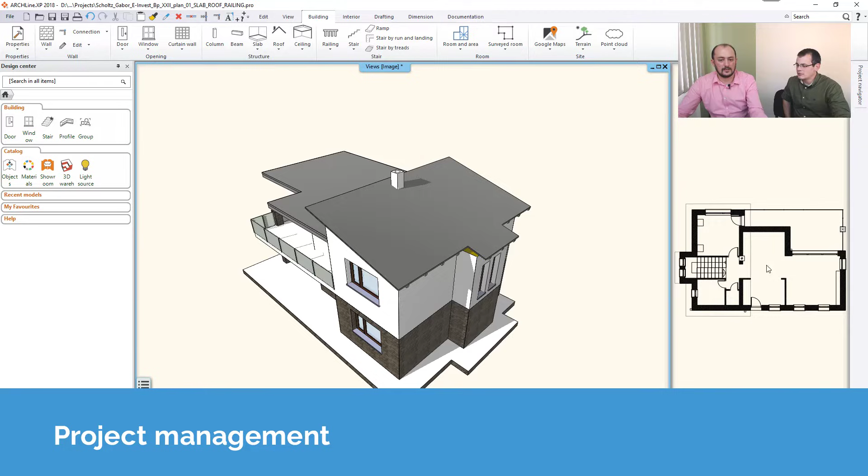Managing the project contains several things, and now I'm about to cover only one aspect of that: how you can add more drawings and how you can sort those drawings all around. Now we have two contents, the 2D and the 3D, and when I would like to highlight one, I click on it and enlarge it, highlight the other one, create another one.

But if I create extra drawings like the section, for example, in that case I will go to the documentation part, create section, define section, set up the details. Now I just use the defaults. And then I draw the section line from point to point, set up the view direction, and then I have an extra drawing. When I hit yes, the software generates this basic layout.

This is just a conceptual setting now. We did not set up details, so that's simple now. But as I further develop the model, it will automatically also detail, and now I have an extra drawing.

So now if I click here, I will organize the content like this. I click here, and this is already part of my project. This way I can shuffle my drawings in a way that it's easy to access, easy to manage. If I would like to create something like an elevation, for example, I go to the project navigator and there is this elevation tool.

This allows me to add an elevation here. Let's say I would like to create a northern elevation of this building. So I click here and say create a north elevation, yes, create elevation view, and then I have an extra drawing with its proper 2D symbol. It's automatically generated, you just click on it and it's created. From that point on, this is also part of this project.

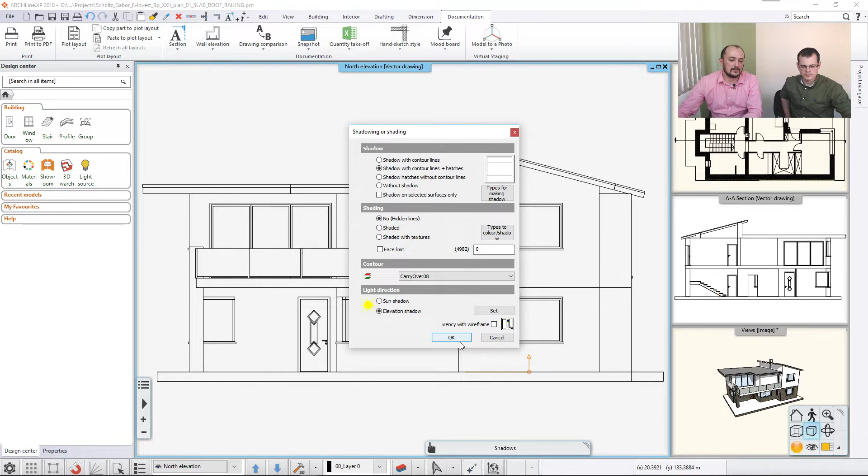If I would like to change the visual style of this elevation, I can do that as well. I go here, on this center button in this navigation bar, and select the settings I would like to use. I keep everything on basic now, just use elevation shadow, hit OK, and the software generates this for me.

I can add extra details like dimensions. For example, an elevation dimension, I just set up the zero, click here again, move it somewhere here, and then just click and click. We'll cover this in detail during the third show about documentation.

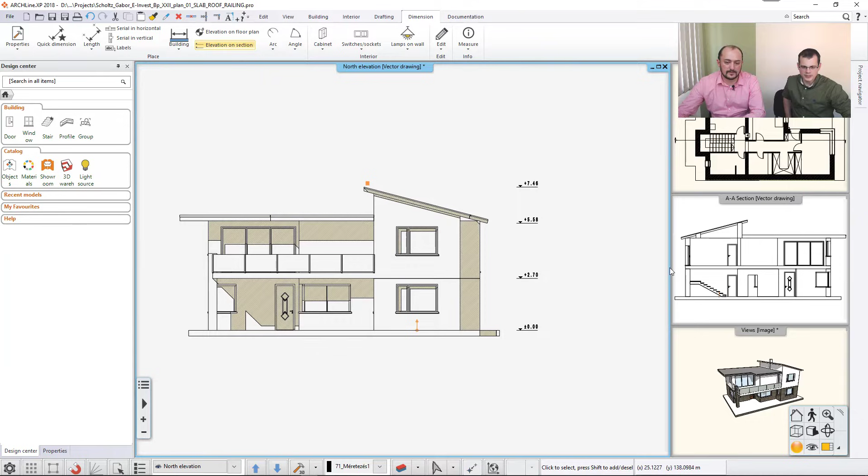That's right. But you touched upon an important topic, and that is visuals, because you already had the elevation shadows, and we talked about sections and this kind of documentation drawings. How do we go about adding some basic visuals? Because this is a conceptual phase, so we are not looking for very elaborate documentation, but what can we do at this point?

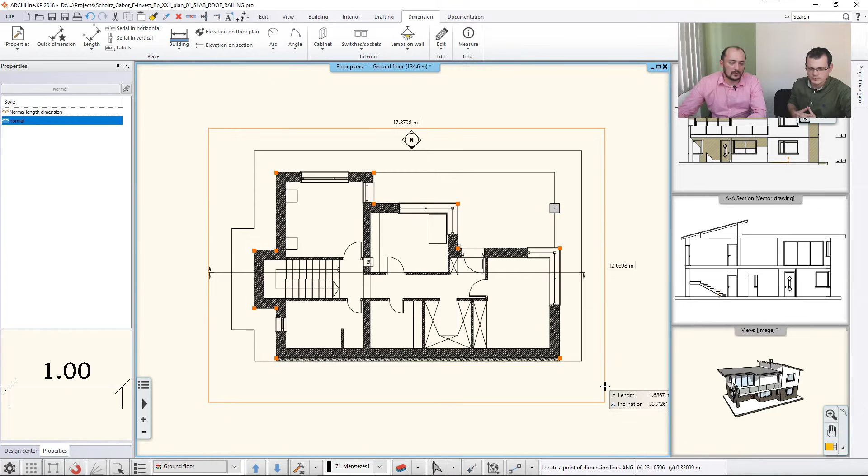Yes, what I do before that is quickly select all the walls, and I actually use this tool here, the all walls tool, select the whole content, and put it over here, for example, so the software automatically measures everything. So I just have at least a minimal detail here.

Then I can go and find the visuals by simply opening up the 3D layout, and I get to decide when I would like to create a visual style like this one. In that case, I go here and find that, okay, this should be only colored.

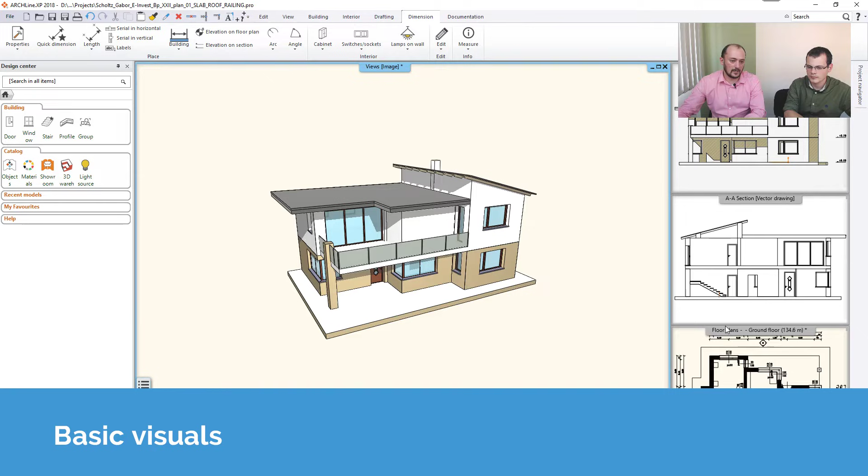This should be like a hidden line removal drawing, or there's another popular option: a consistent color, which shows only the pure surfaces without shading, and just the basic shadows appear here, which I can set up.

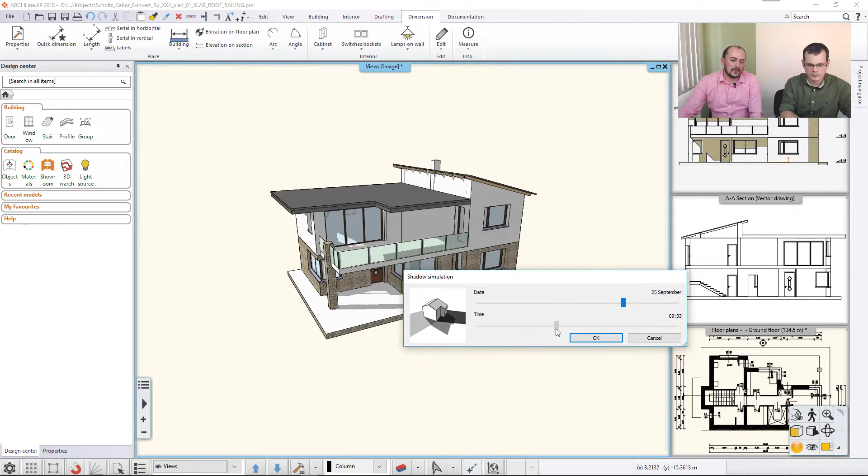I can also change how the sunlight affects this building by simply clicking here and finding the shadow simulation, and then I can move the date and the time around and find something better, like for example this one, and then I can go here and find the rendering option to create a rendered visual.

Now at this point I think I will load the final project. Yes, because it already has, I'm sure I'm not revealing a big secret when I say that rendering depends on two things: one is the lights you have set up, and the other is the materials and textures you already set up in the project. So now we already have that covered in this version.

Now we will only render for a few seconds, because rendering is very heavy on the CPU, and right now we are using this computer for streaming the webinar, and we don't want that to break up. We'll just give you a glimpse at how that works.

We won't finish rendering, so I just set up the view, the angle from where I would like to make the render. I click here and say, okay, create a rendering. You can decide to have a final render or the real-time draft, and then you just set up the settings, hit OK, and the software generates the model and opens it up in the renderer.

And if you selected the real-time render, this will automatically synchronize the changes to the renderer, which will eventually appear in the rendering, which we won't cover now. We will do that in a later session.

Yes, you will be able to generate rendered images that you can save as a JPEG file, and then you can also make it part of your final design. That's right.

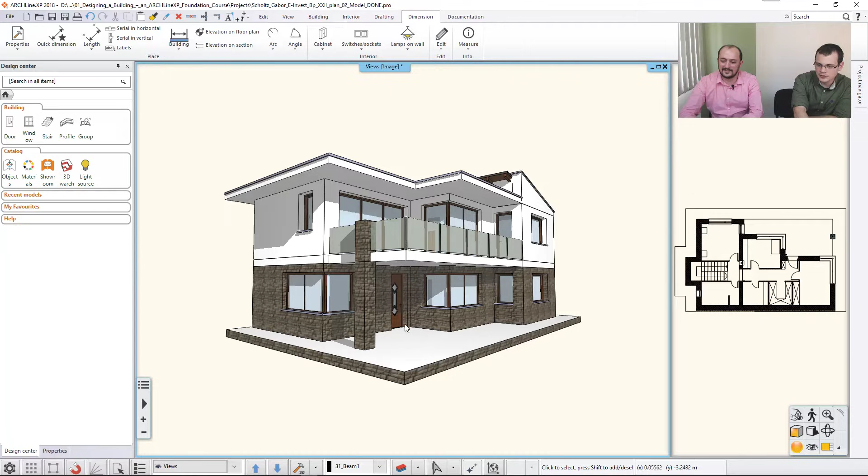Okay, so there's a very important one here. Is the height of the wall defined by default? Well, it has a default, so all walls and elements have default heights, which are stored in the style. So when you choose the relevant style, it comes with not only the materials and thickness, but also the height values. You can manually change the heights and save it as another style, but you can do it individually.

One important thing to point out is that the structural elements are linked together. So when you change the floor height, everything else complies with the changes. That means you are not defining, in this scenario at least, the walls one by one. Instead, you define that they have to be in connection with the slab above them. You can unlink this connection, but in these kinds of scenarios, it's usually better to keep them linked. That said, you can manually define the walls and other elements one by one.

For users who use earlier versions of ARCHLine, like 2017, 2016 or others, where this constraint worked a little differently or didn't exist, it's important to see that this is compatible backwards and forward. So whatever you did before, just keep doing the same thing. The software is intelligent enough that when you change a value, it understands that if it was constrained, it will keep the constraint relative to the changes. So if you don't want to use the default values, just go with the values you'd like. I really encourage you to use the style system to save your own styles, it saves so much time. Or if you already have them, just inherit them from the earlier versions of ARCHLine and keep working with them. It will work just brilliant all along.

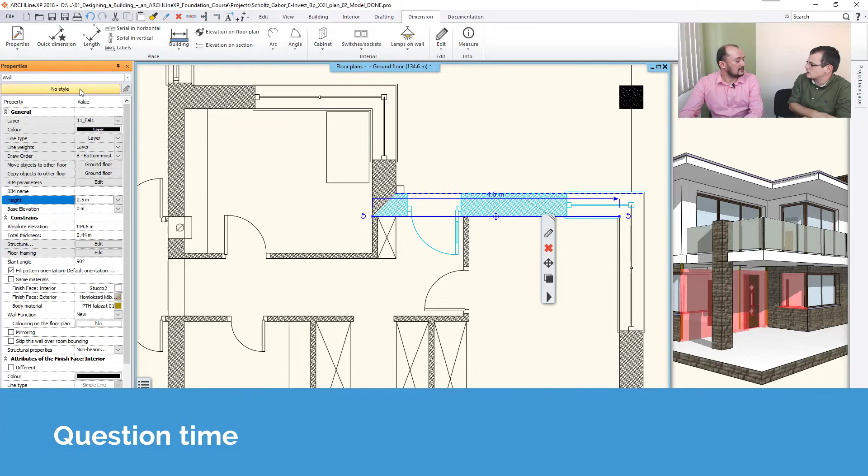Yes, we have separate topics obviously. Interior design is the last one I've seen, and it's in the works now, being updated from the 2017 version. We are also shifting from a lot of written manual content to more online content and videos. Our team is continuously working on new videos, not only webinars but also tutorial videos covering several aspects of the software.

I think the quickest help you can have in 2018 is that if you move your mouse over a command, let's say the wall tool here, it comes with what we call a tooltip, with a little description of how you can use it. Or if the command is too complex for a short description, it tells you what this tool is, if the command itself isn't self-explanatory. Also, you can search for keywords up here.

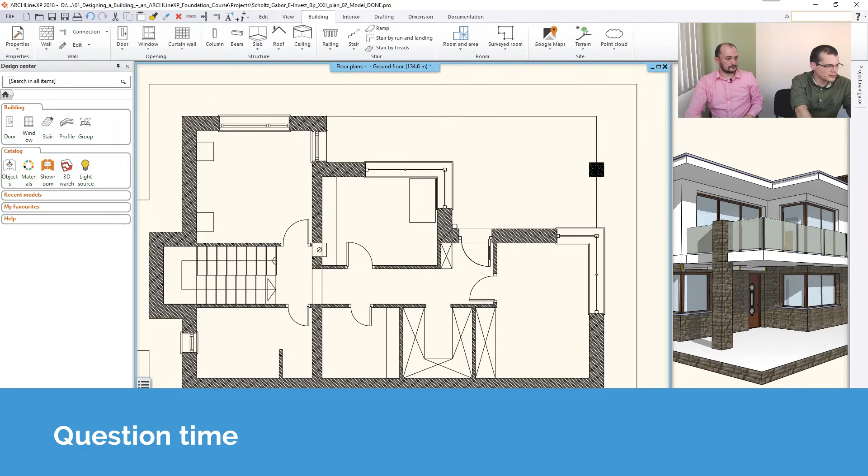As you remember, this is what we wanted to cover at this point. What happens next time? This Thursday, as you already know, at 3 p.m. Central European Time, we are going to have the next session, which looks at the very same project for the next stage. We look at how to import architectural and other external data. We talk about geodetic surveys, object libraries, DWG files, how to handle DWGs, how to turn two-dimensional drawings into three-dimensional ones. So it's going to be very exciting topics, tune in for the next show. Also sun access calculation, so there's a lot to cover. Hopefully we can squeeze that in.